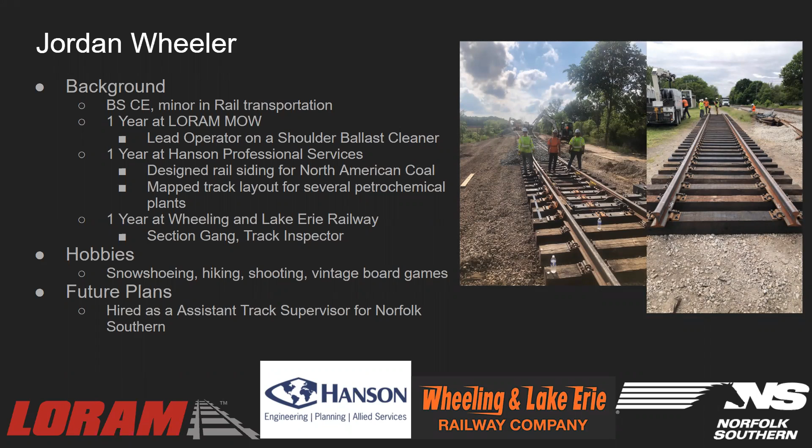I'm Jordan Wheeler. I'm graduating with a degree in civil engineering with a focus in transportation and a minor in rail transportation. I did one year at LORAM Maintenance of Way, where I was a lead operator on a shoulder ballast cleaner. Then I did a summer at Hanson Professional Services where I designed a rail siding for North American Coal and mapped out the site of a proposed and current track layout for petrochemical plants. Last summer I interned at the Wheeling and Lake Erie Railway, where I worked on a section gang and also as a track inspector. Some of my hobbies include snowshoeing, hiking, shooting, and collecting vintage board games. I've also accepted a position at Norfolk Southern starting in June.

My name is Kevin Tran. I'll be getting a degree in civil engineering. I came into this project with no prior experience, so all of this was kind of new to me. Some hobbies I have include skiing and hiking.

My name is Stewart. I'll be graduating with a general degree in civil engineering. Background: I had two internships with Alfred Benesch & Company, one in Wisconsin and last year in Michigan, getting experience with inspection, materials, sampling, calculations, and other measurements in the field. In Wisconsin I did some work on bridge parapets; the rest of the work in Michigan included guardrail, mumble strips, patchwork, and other tasks. I also have two summer years of experience with the family business drilling residential water wells and servicing existing systems. I enjoy mountain biking, snowboarding, disc golf, and whatever sports are going on at the time, like basketball, volleyball, and soccer. I've accepted a position with Canadian Pacific as a civil EIT, and I'll be starting there later.

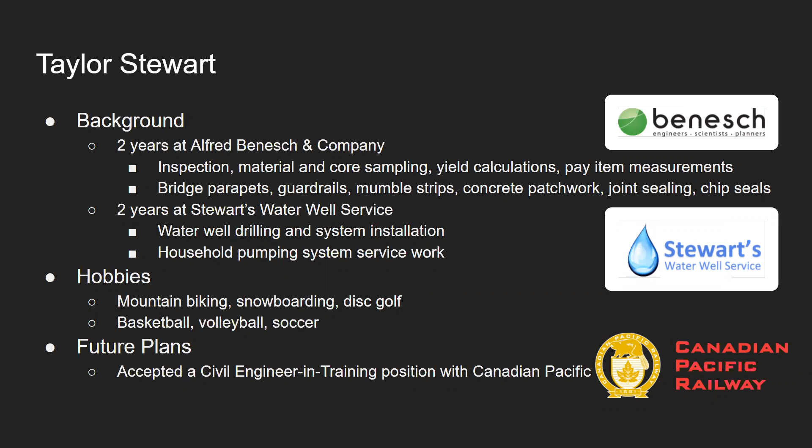As an outline of our presentation, we'll go over a quick project overview, the location of the project, important milestones we needed throughout the way, challenges we faced throughout the entirety of our project, labeled map views of the streets we plan to discuss, the existing drawings as well as our proposed drawings, and our proposed pavement designs.

We'll also cover our material estimates, our invitation to bid document that we created, and the construction cost and construction schedule of the project, as well as our man hours.

For our project overview, our project will take place near Iron Mountain, Michigan. It'll be led by the Dickinson County Road Commission. The three roads will be done as a crush and shape project, where the existing asphalt layer is crushed and mixed with the aggregates below before repaving.

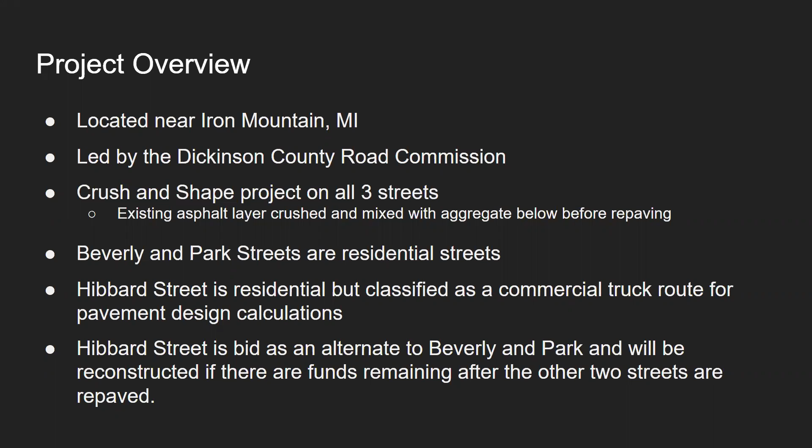Park and Beverly Street are classified as residential streets, while Hibbard Street is also a residential street, but we classified it as a commercial truck route for our design calculations. Hibbard Street is actually bid as an alternate to Park and Beverly, meaning it will only be done if there are funds remaining after the reconstruction of the other two.

Some of the challenges we had throughout this project included using the American Association of State Highway and Transportation Officials Design Guide. Dickinson County uses the 1989 interim structural guide, which none of us had ever had experience with before, but we were able to figure out how to use it pretty well.

There was also the late addition of Hibbard Street to the bid package. It was originally on there, taken off, and then put back on about two weeks before the bids were to go out. There was also the addition of sloped HMA curb, which required us to add a special provision in the invitation to bid document.

Here's a labeled map view of the project. Hibbard Street is on the north side, Park Street on the east side, and Beverly Street on the south. The red lines across the street are existing culverts, and the yellow lines along Park and Beverly are existing ditch lines.

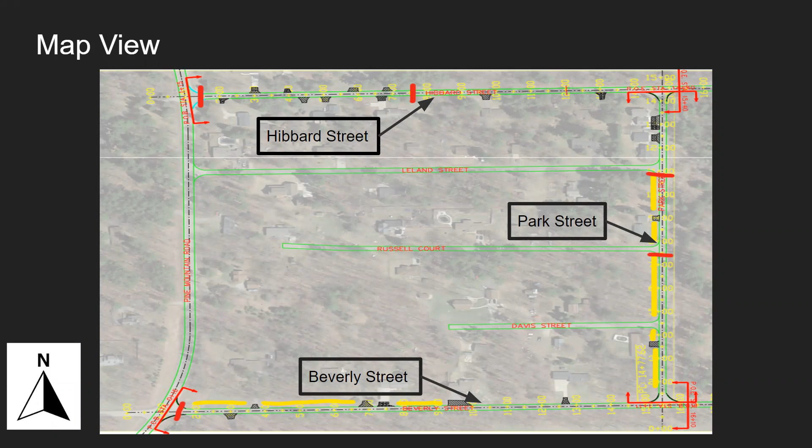We also created some existing cross sections. Park Street is at the top, with 10-foot lanes and 1 to 2 foot gravel shoulders. Then Beverly and Hibbard are in the bottom left corner, and those have 11-foot lanes and 1 to 2 foot gravel shoulders.

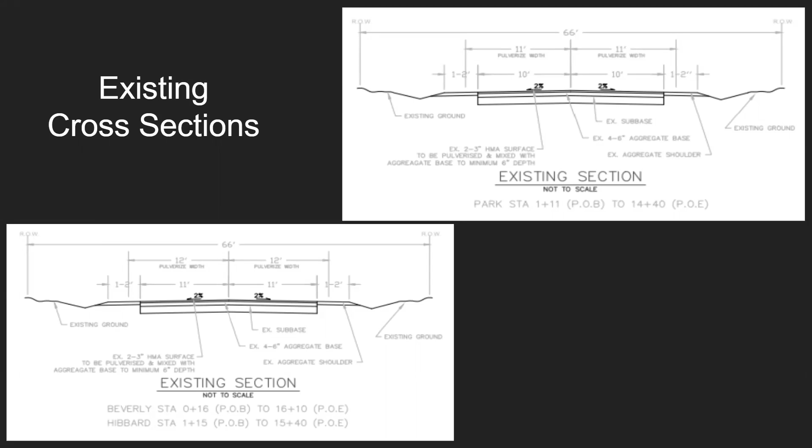For the proposed cross sections, everything's going back to existing conditions, so lane widths and shoulders will remain the same width. We needed a third proposed section for Hibbard Street due to a different pavement design than Beverly has.

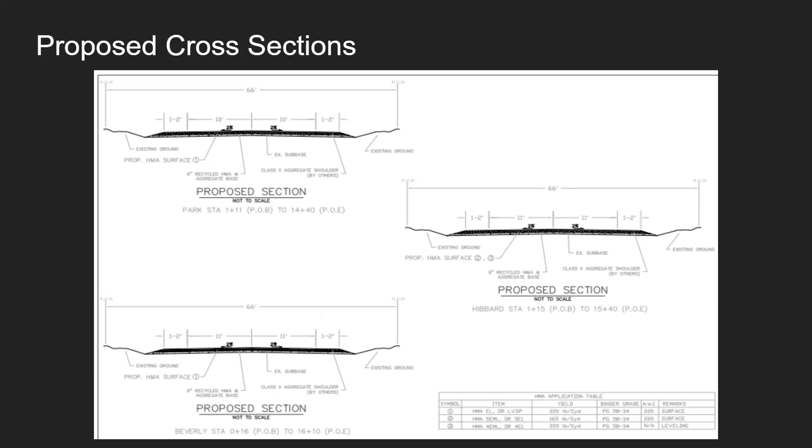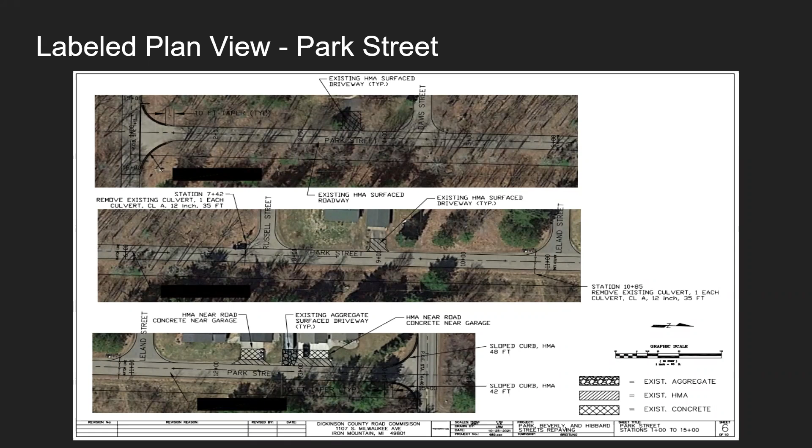Here's our labeled plan views, with Park Street having all the call outs so construction contractors know the important items to look for. We also created this for Beverly Street, and the same for Hibbard Street, with all the labels.

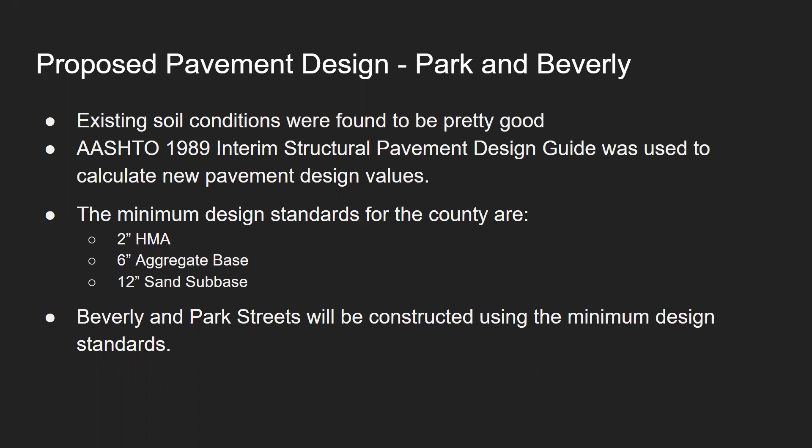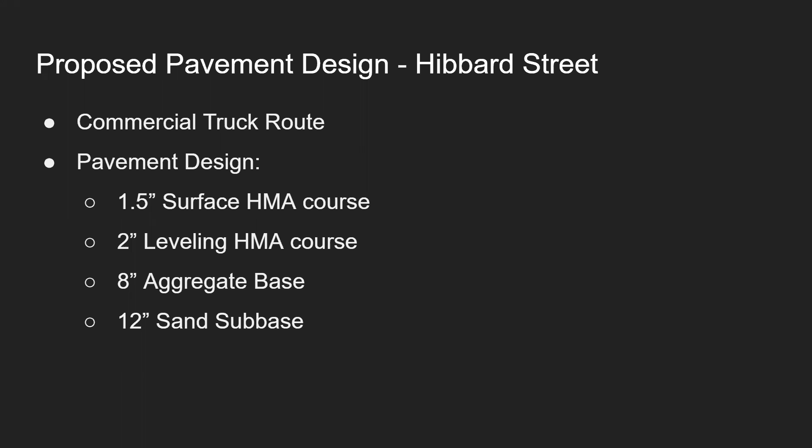This is Hibbard Street, the addition to the project. This is a commercial truck route, so the design will include 1.5-inch surface HMA, 2-inch leveling, 8-inch aggregate base, and 12-inch sand subbase.

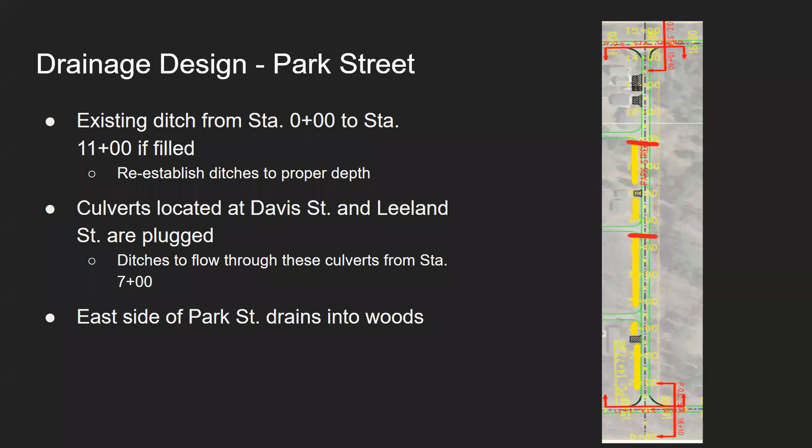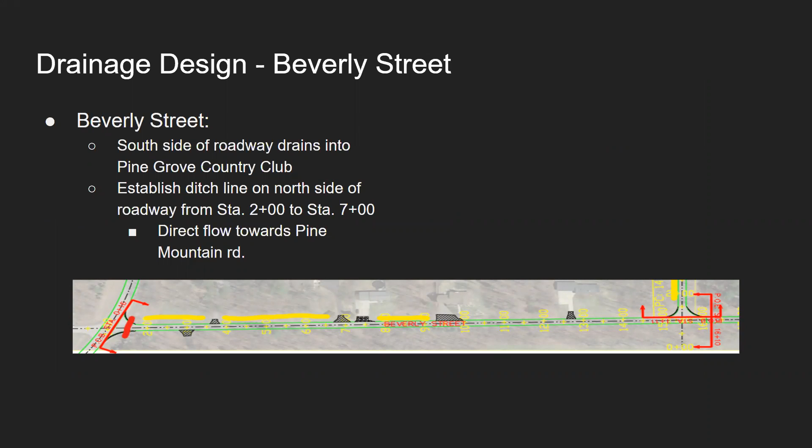Here is the drainage plan for Beverly. There are no culverts to be replaced on this street, and they will flow to the west towards Pine Mountain Road before meeting up and draining into the golf course to the south.

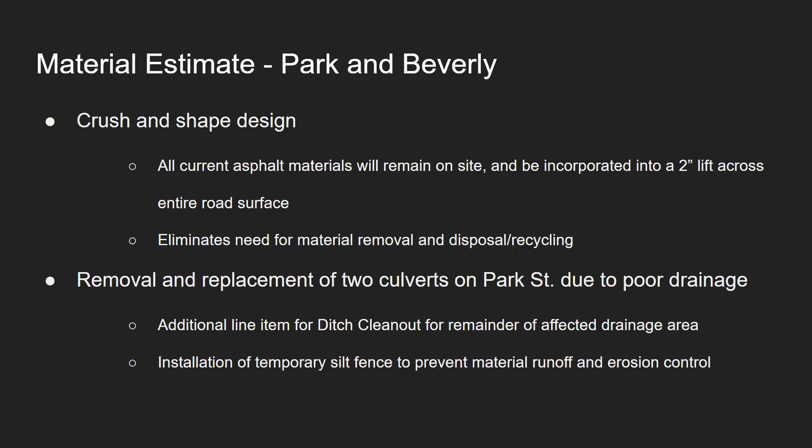The materials we estimated are for a crush and shape project as noted. On Beverly and Park Street, this will incorporate a 2-inch lift across the entire roadway surface. This eliminates the need for material removal or disposal and recycling. We also included an additional line item for ditch clean out for the remainder of the affected areas, and the installation of temporary silt fence and riprap to aid in material runoff and erosion control.

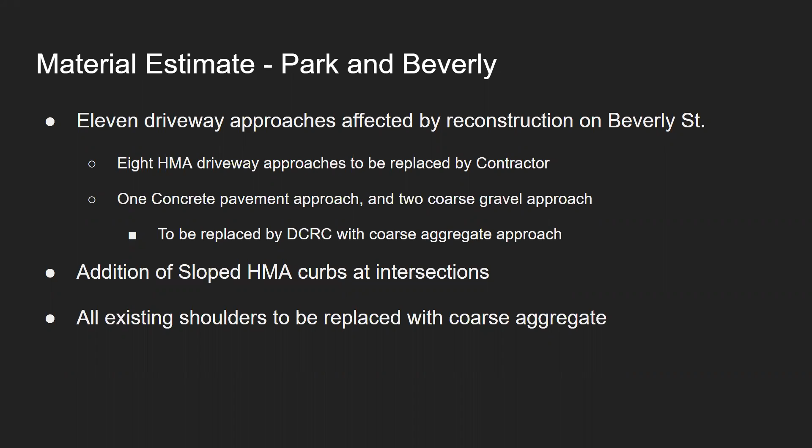There are going to be 11 driveway approaches affected by the construction. 8 HMA ones will be replaced by the contractor, and the concrete and 2 coarse gravel aggregate driveway approaches will be replaced by aggregate, done by the Dickinson County Road Commission. We also had the additional line item of HMA slope curbs at the intersections of Park, Beverly, Hibbard, and Pine Mountain Road. All existing shoulders as well are going to be replaced by coarse aggregate by the road commission.

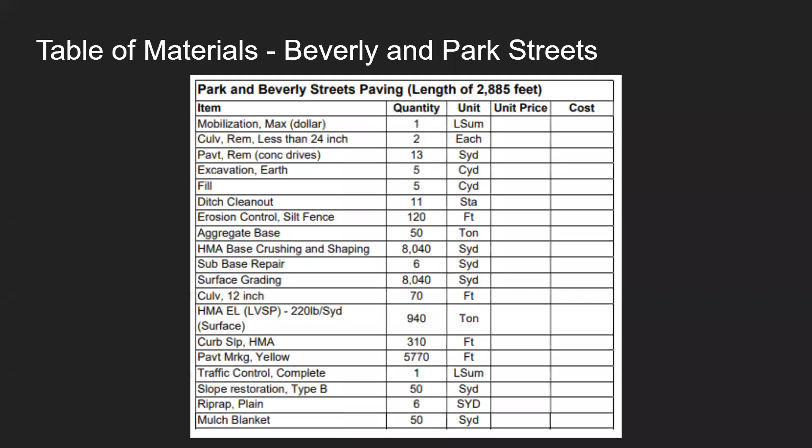There is a list of all the quantities that we used for our project. This was included in the bid document that we submitted to the Dickinson County Road Commission.

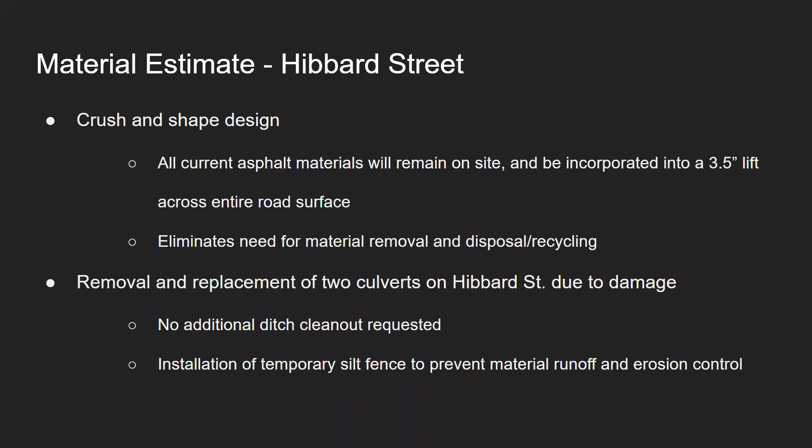There are 9 driveways affected on Hibbard Street. 6 of them are HMA, to be replaced by the contractor. 1 concrete and 2 coarse gravel aggregate driveways will be replaced by aggregate approaches by the Dickinson County Road Commission. We also have the gas valve adjustment and the additional sloped HMA curbs.

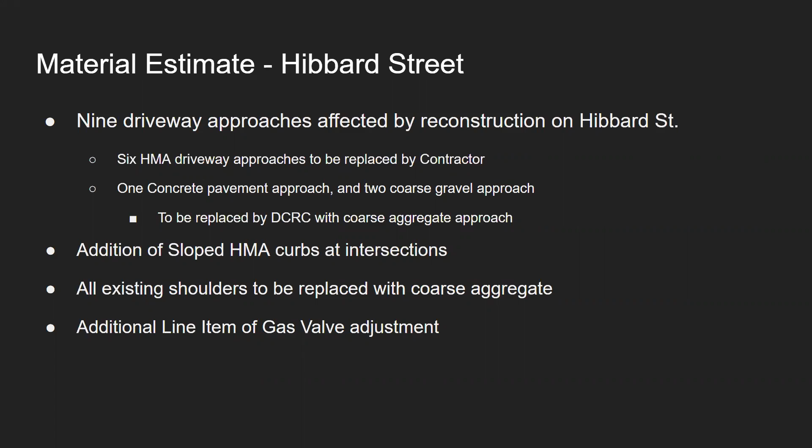Here's just a list of the quantities we had for Hibbard Street.

Here's our implementation to bid document. It follows Dickinson County Road Commission's document fairly closely. They have items in there that they require for each project, so included are our proposal and specifications, which include project details and technical specifications about the project, as well as instructions to bidders on how to submit a bid, what's included, and what to expect.

Bid blanks are included for both Park and Beverly Streets and Hibbard Street. Again, those are separate, so the contractor, whoever's bidding, could submit 2 separate bids. They'll be at the discretion of the County Road Commission as to whether or not to include Hibbard, depending on the budget pricing.

We have general specifications covering what the bidder is going to bring to completion of the project, including contract terminology, all the legal stuff, what they're agreeing to, and payments. We also have our utility coordination notice, which lists the utilities that will have to be coordinated.

We have all the contact information listed there, and special provisions for this project.

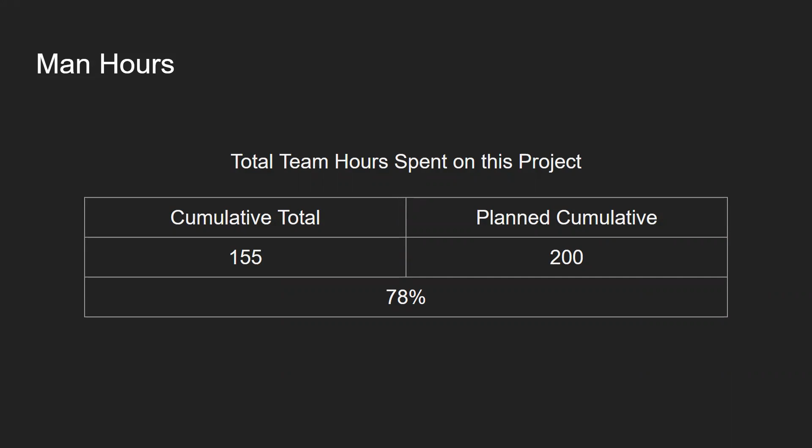And then the second half was reports, estimating, and scheduling. And acknowledgements to Lance, the engineer for the Dickinson County Road Commission, that we worked closely with to get the bid ready for submittal, and those people that find us today.

Questions? I do. You go back to your schedule. Yeah, so you really expect folks to work on the 4th of July? I didn't catch that earlier.

We just selected a date when it would potentially start. And yeah, that would definitely be a block out there and push it back a couple more days. I appreciate you giving me the free pass to do that.

Yeah, there was a previous group that mentioned we don't work on weekends, right? It's a good catch. Are there any other questions from the audience?

You guys got a contract right for 21 days. Contractor schedule was 14. Just last week, get another letter from the township, they're pulling out, and we'll go down to 2023. The actual bid was 331,000 and something.

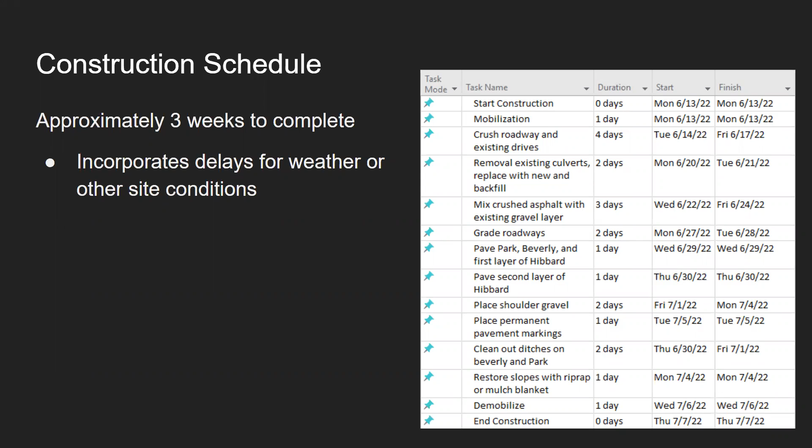I told you guys to use 80 or something. Well, guess what? I was wrong. But so you guys did a good job.

Contractors don't work Sundays. Yeah, we plan for just during the week, 8 to 10 hour days. And then, like you said, the 4th of July, we didn't catch that, but that would be out of there. We also incorporated about 5 days for weather delays, just for contingency.

You guys did a good job, and thanks for helping me get through this one. So.

Well, I think on behalf of the team, I also appreciate your willingness to walk us through the project with the team, because this is the actual project, no matter what is built this year or next year, you guys can always welcome to check it out, right?